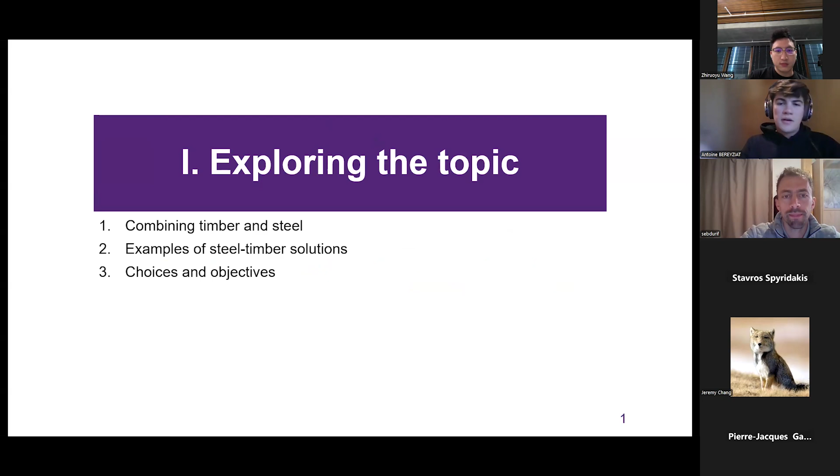I'll start by giving you a bit of context. Before going into more detail, let me explain why we chose to combine wood with steel. When we look at the properties of these materials, it becomes clear that they can be combined to make them complementary. First, steel is highly ductile, whereas wood has a near brittle failure.

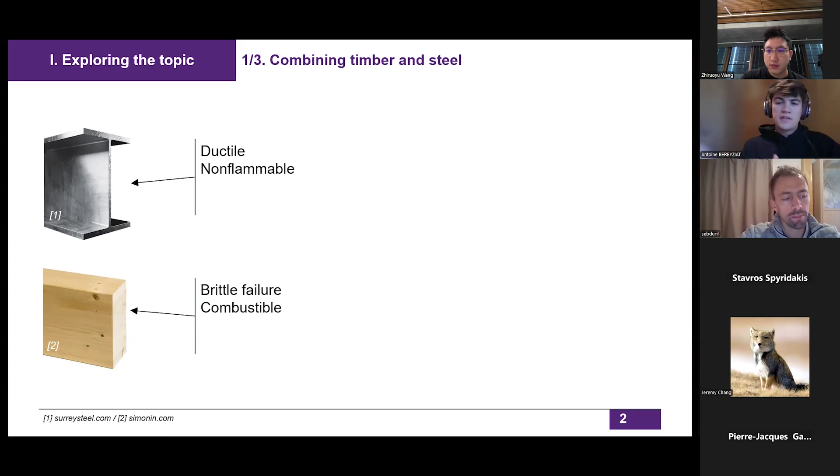Moreover, steel is non-flammable, whereas wood is combustible. But the fire resistance of steel is very low because its rigidity and strength decrease sharply when its temperature rises. On the contrary, thick wooden elements have good fire resistance. Finally, steel elements are vulnerable to instabilities, warping and buckling, while wooden members have strong cross sections.

Steel and timber also share common features that make them compatible. They do not require water in the building process, and they are suitable for off-site construction.

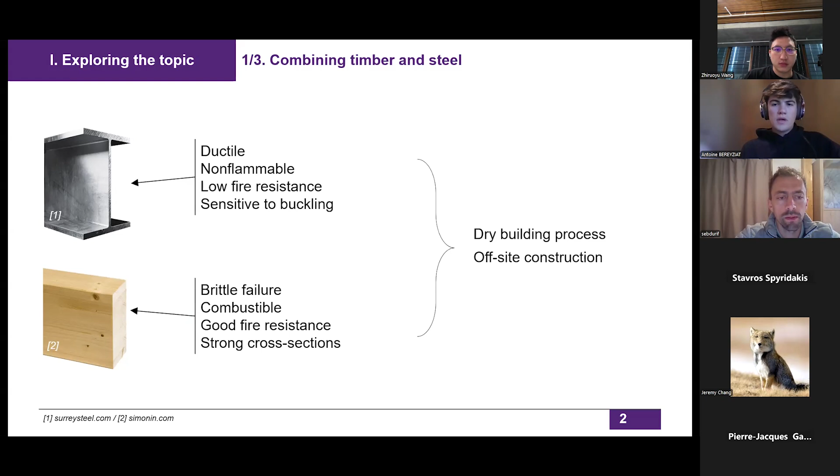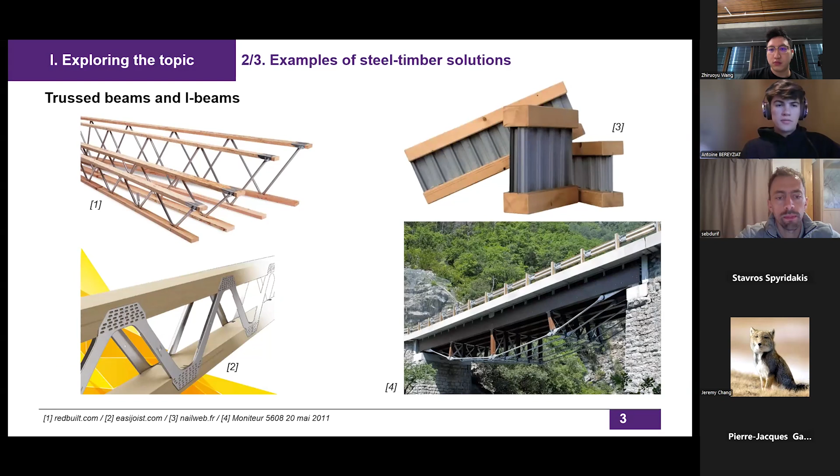Here I have some examples of mixing timber and steel in structural members: truss beams, I-beams, prestressed timber, reinforced timber. I'll pass quickly over these examples — flitch beams, and a large variety of profiles with wooden members. These are already being built, existing with this kind of process.

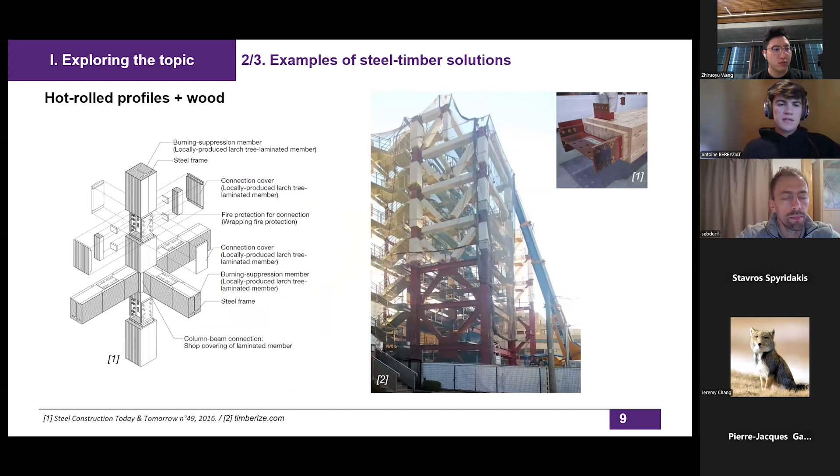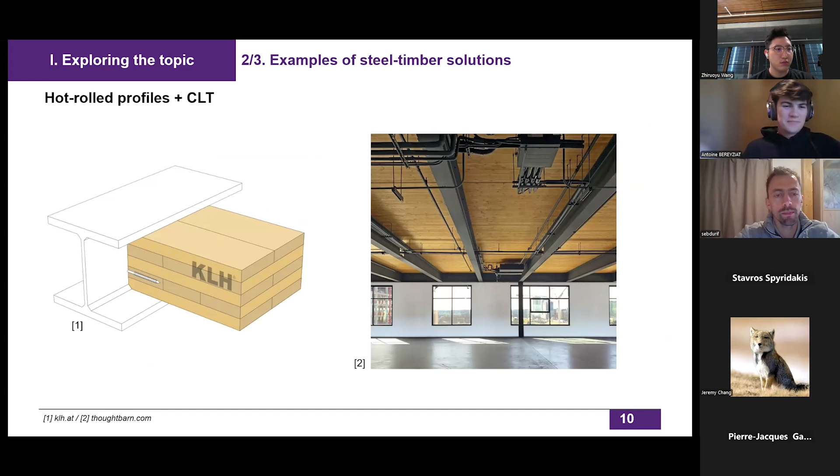Sorry. CLT — Sébastien will tell you more about that later. Faced with all these possibilities, we have chosen to focus on solutions with hot-rolled sections, mechanically assembled with wooden beams.

Preliminary studies on this subject were performed in 2016, and the aim of my thesis was to take these studies a step further by integrating fire situation and fire resistance. I will now move on to the structural analysis of the studied beams.

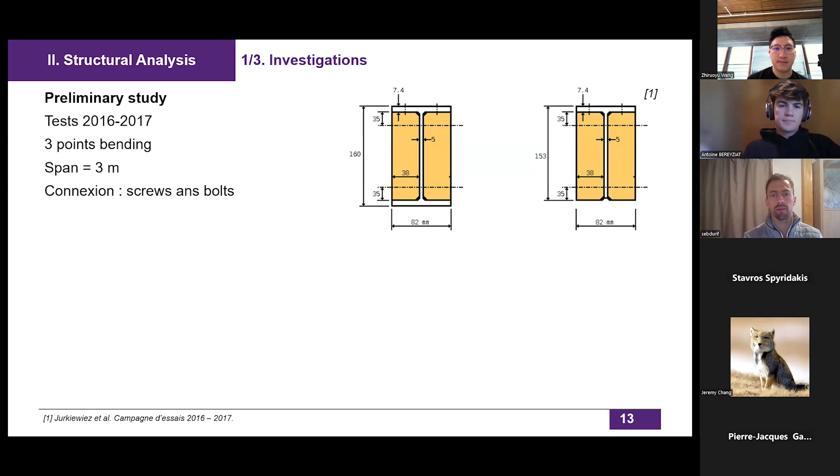Here you have two configurations, an I section and a T section, each connected with two wooden beams using bolts and screws. For the I section, an elastic linear calculation shows that 90% of the stiffness of the composite beam is attributable to steel, while wood has very little effect on the beam stiffness.

For the T section, the stiffness of the composite beam exceeds the sum of the stiffness of its components, steel and timber. It is what I call a composite action. It results in a stiffness gain of 7% in this case.

This is only possible if there is an eccentricity, a gap between the neutral axis of steel and timber elements, and if there is a connection with non-zero stiffness that transmits longitudinal shear between steel and wood.

In the case of the I section beam, the neutral axes coincide, so there is no composite action. Whereas for the T section beam, it would be interesting to further increase the stiffness gain by increasing the eccentricity of the neutral axis, or by increasing the stiffness of the steel-wood connections.

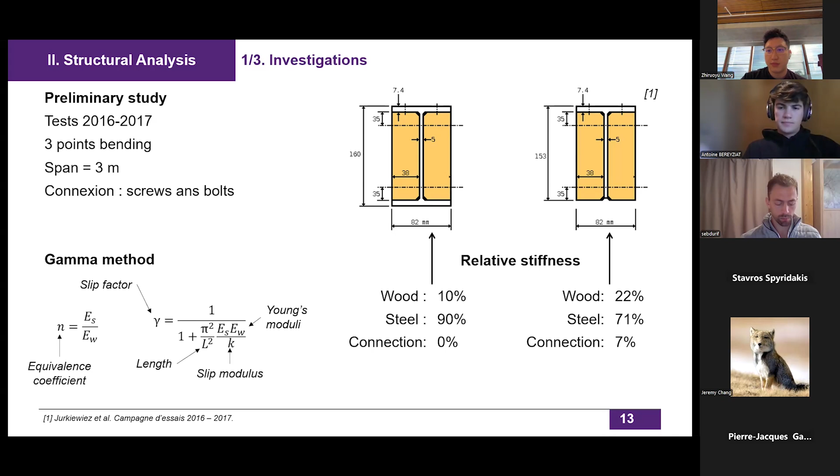But unfortunately, when we try to do this, we generate cracks in the wood, as you can see in this example. And the failure of the composite beam occurs prematurely, and we lose the interest of the composite action. So the stiffness gains that can be achieved are necessarily limited.

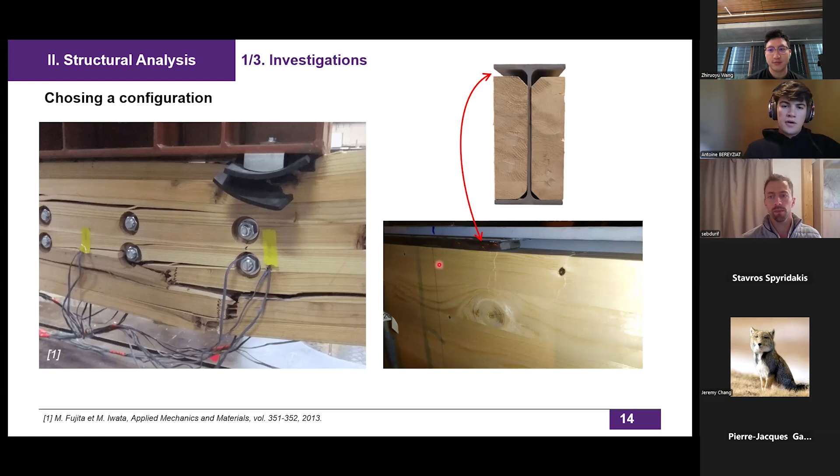That's why I chose to focus on a configuration with no composite behavior, an I-section associated with two wooden beams, with no transmission of longitudinal shear between steel and wood. In this case, vertical loads are transmitted from steel to wood by simple contact, and we use metal shims to ensure good contact between the top flange and the wooden element.

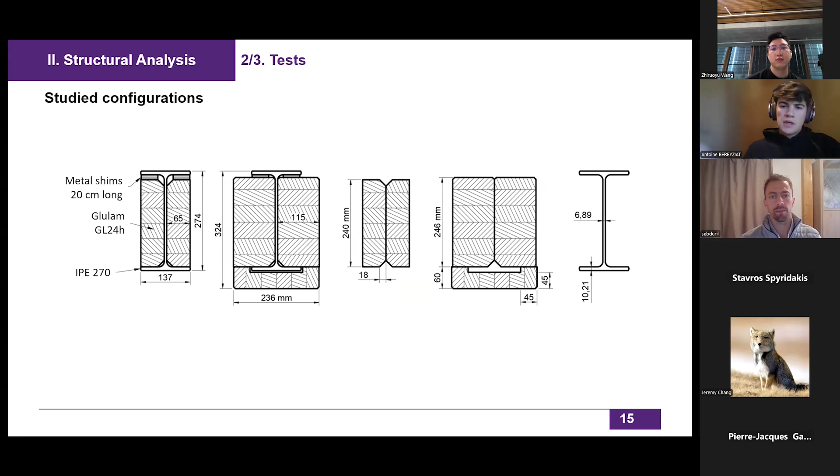Here are the configurations we studied, so two composite sections and their components. We tested this beam with a span of 4.3 meters in 4-point bending. The loading system looked like this, with lateral support against buckling.

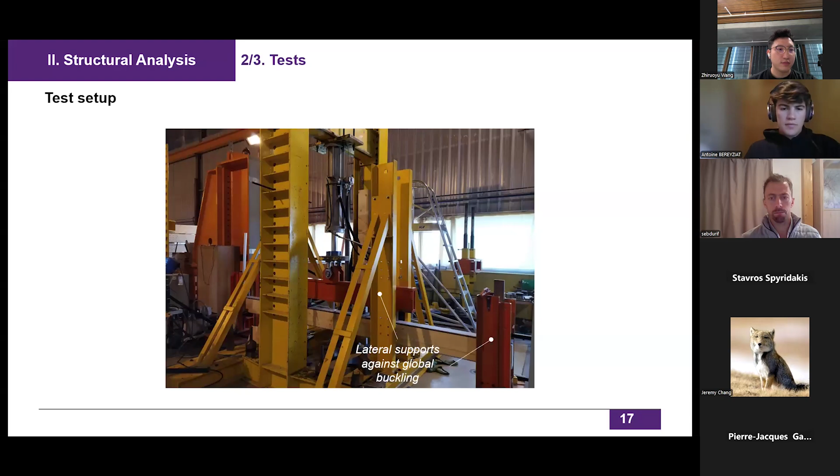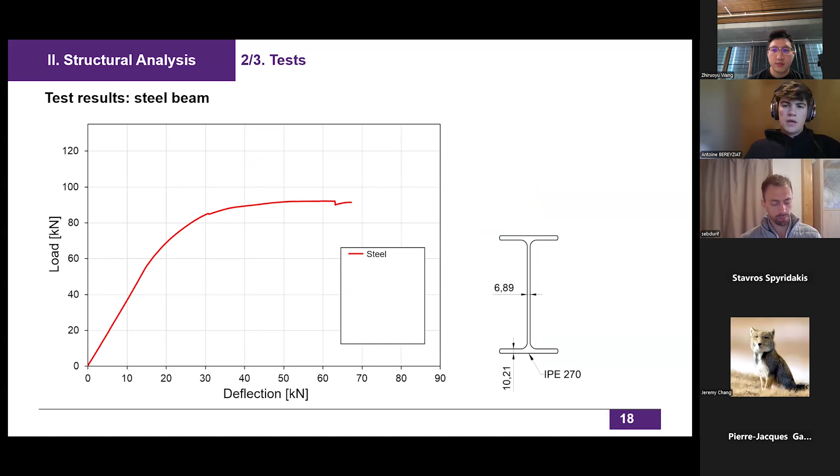So here you have the load deflection curve obtained for the steel section taken alone. Then there are the wooden beams.

In the case of the composite beam, we obtain this behavior. So we have an interesting resistance compared to steel. And in this case,

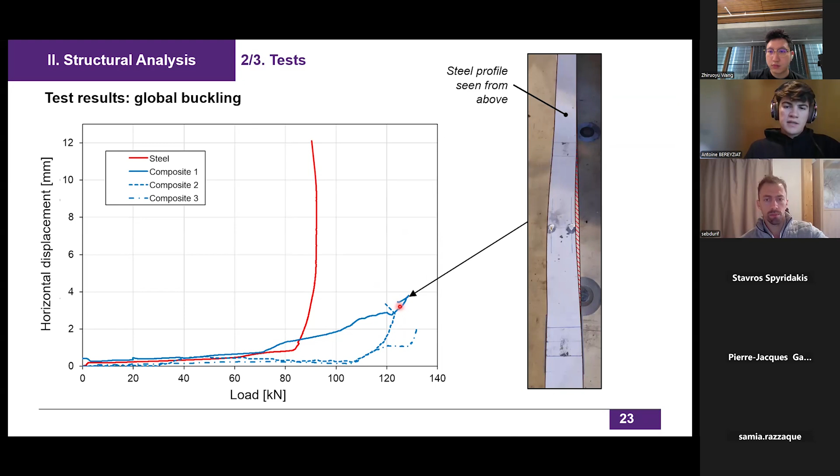After a while, the deformation becomes so great that buckling occurs. But in the case of the composite beam, the buckling occurs much later with less intensity compared with steel-only member.

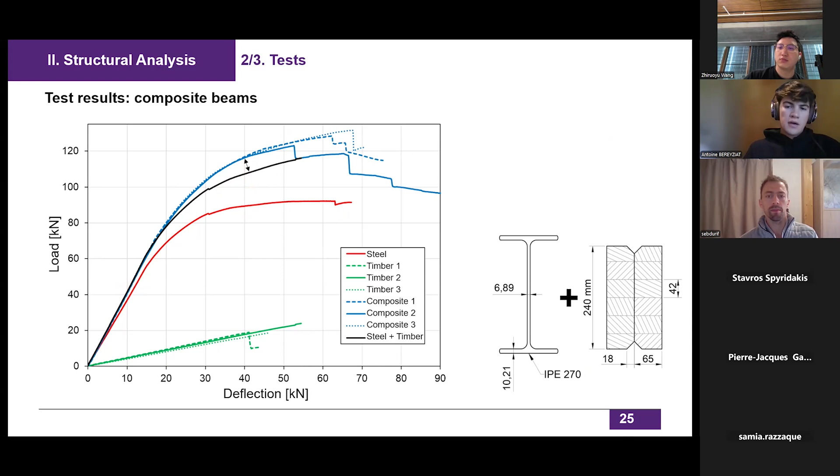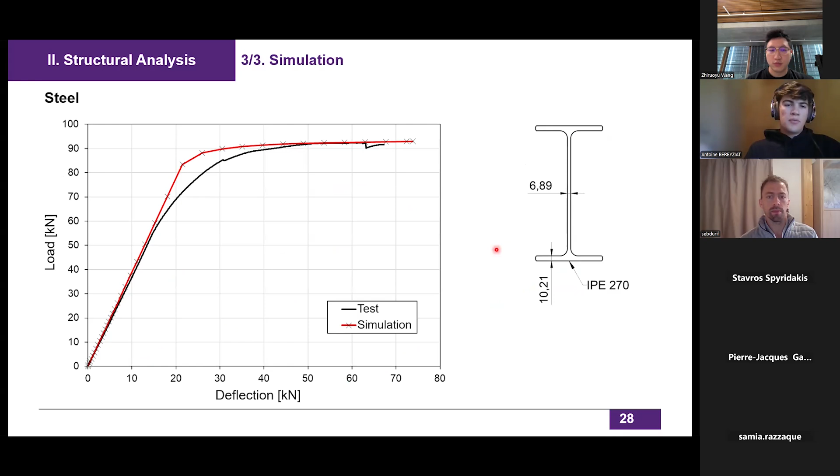This phenomenon is also observed for the second configuration. We made an FE model to try to better understand this phenomenon. Here we can see that it worked pretty well for steel. Same for wood-only beams.

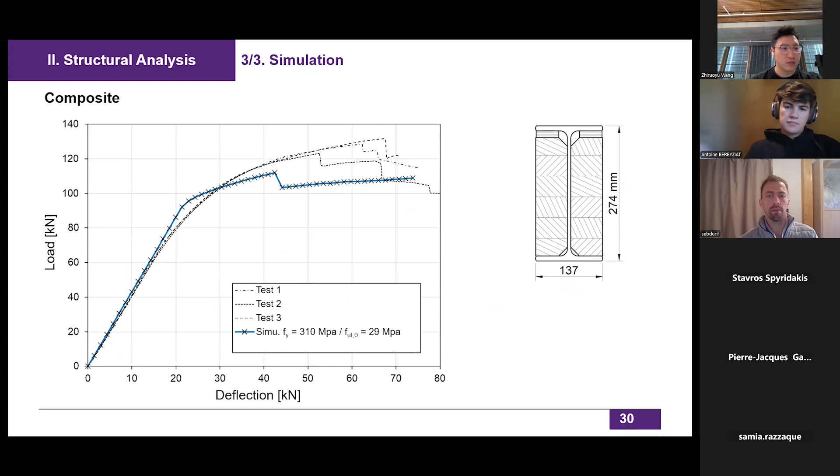But when we use the same parameters for the composite beam, we can see that the composite effect cannot be simulated. In this case, the load is not high enough, and wood failure occurs too early.

I managed to obtain a satisfactory match by increasing the yield strength of steel and the tensile strength of wood. I have the same kind of results for the second configuration. So this manipulation of the model parameters highlights the importance of the composite effect, but does not provide a physical explanation of this phenomenon. So further work is needed to fully understand and explain it.

Next, let's look at the behavior in a fire situation and how timber can be used to protect steel against fire.

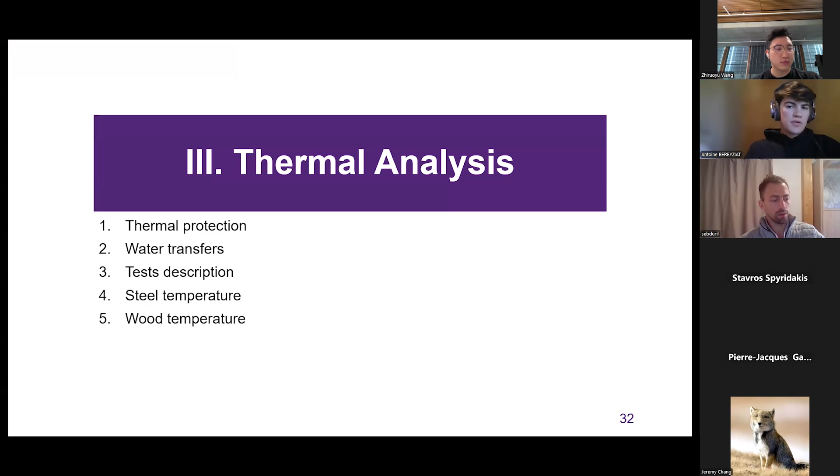This idea may seem counterintuitive at first, given that wood is combustible. However, it is also an insulating material which burns relatively slowly.

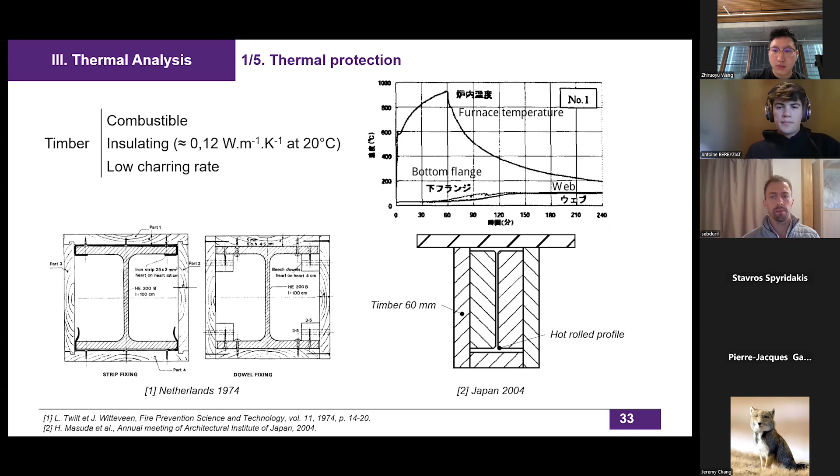This idea is not new, as tests have already been performed in the Netherlands or in Japan, for example. And this principle is already used in some buildings in Japan. Japan only, as far as I know.

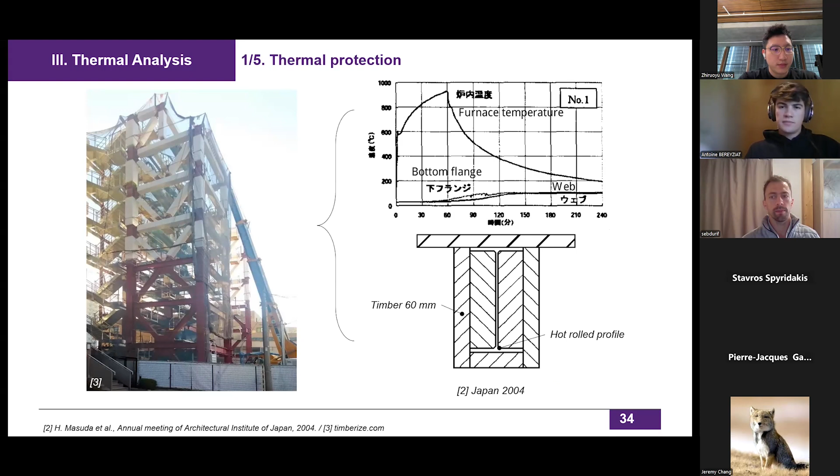Timber also contains water, which helps protect steel against fire. It allows keeping the temperature of steel at around 100 Celsius degrees for several minutes.

This phenomenon is explained by the mass transfer that takes place in wood because of the temperature and pressure gradients that occur in a fire situation.

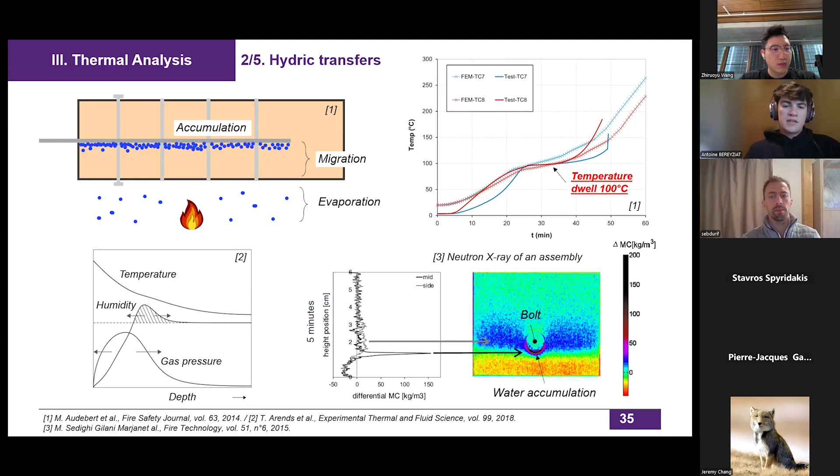So some of the water contained in wood evaporates outside, and another part migrates inside the wood. This migrating water will eventually reach the metal plate and accumulate, which explains the temperature dwell on the steel temperature measurement. This accumulation phenomenon has already been observed by X-rays on bolted assembly, as you can see here.

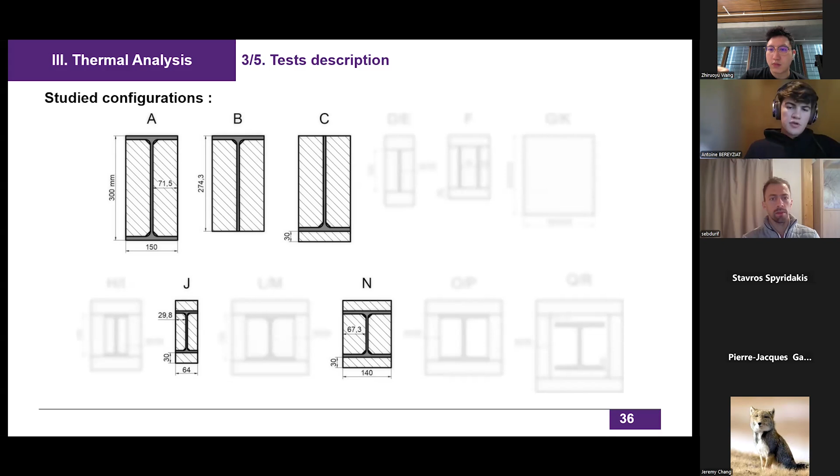So we tested these configurations during two unloaded fire tests. Here we have fully protected configurations, more simple geometries, and finally a configuration in which steel is partially exposed to fire. The test specimens were 80 centimeters long and were exposed to fire on 3 or 4 sides.

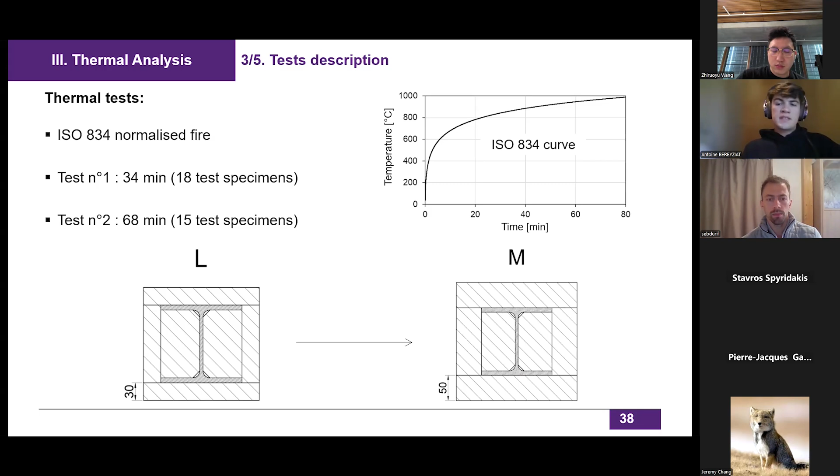In the first test, 18 specimens were exposed to a standardized fire, ISO 834, for 34 minutes. The fully protected profiles were covered with a 30 millimeter thick timber board. In the second test, 15 specimens were exposed to fire twice as long, and the timber thickness was extended to 50 millimeters.

First, the measurement showed that the thermal protection provided by wood is effective. For example, for this configuration, steel keeps below 200 degrees for over 30 minutes when using 30 millimeter thick boards. This time rises to over an hour for 50 millimeter thick boards, and during this time the steel remains intact.

Secondly, we can see that the temperature dwells at 100 degrees Celsius for several minutes, reflecting the beneficial and non-negligible action of the water contained in wood.

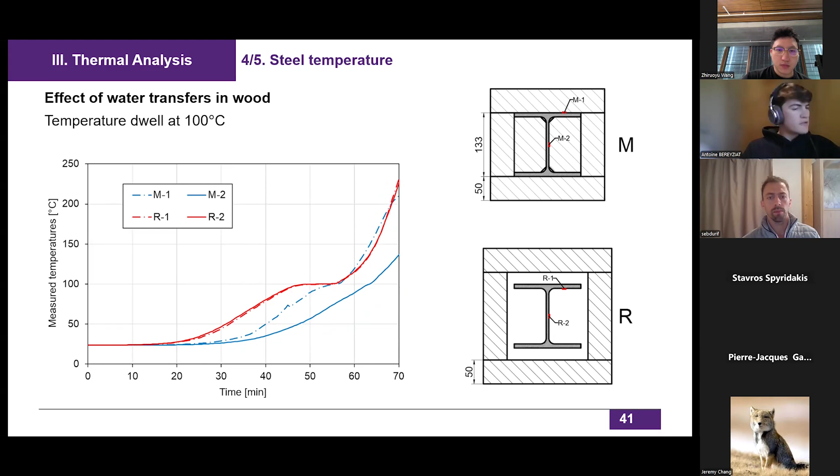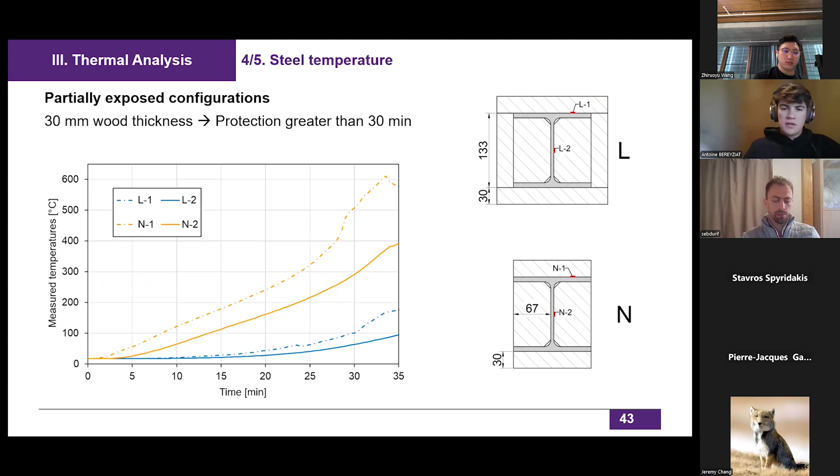Fourthly, on this graph you see that configurations partially exposed to fire, with steel partially exposed to fire, are obviously less effective, but they offer a certain protection. As you can see, the steel remains below 500 degrees Celsius after around 30 minutes, so it's non-negligible protection. If the profile were completely unprotected, it would reach this temperature in just 10 minutes.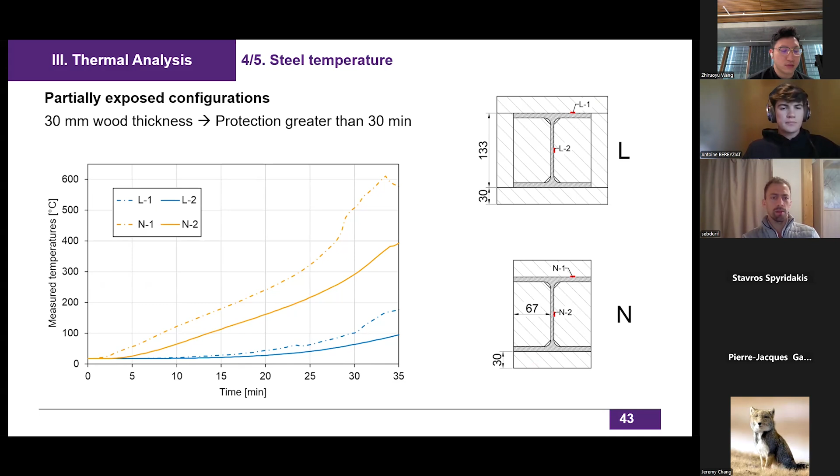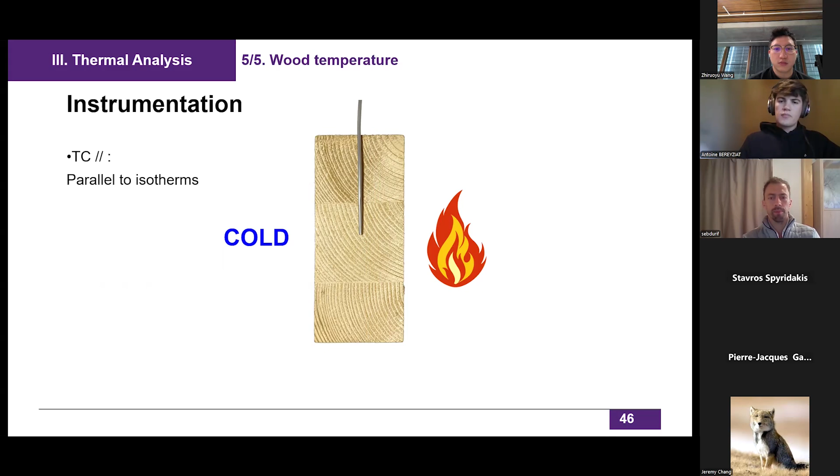Regarding the wood temperature, I would like to speak about instrumentation. We investigated different measurement methods regarding the orientation of the thermocouples. The thermocouple can be placed parallel to the isotherm like this, perpendicular to the isotherm on the cold side, or on the hot side like this.

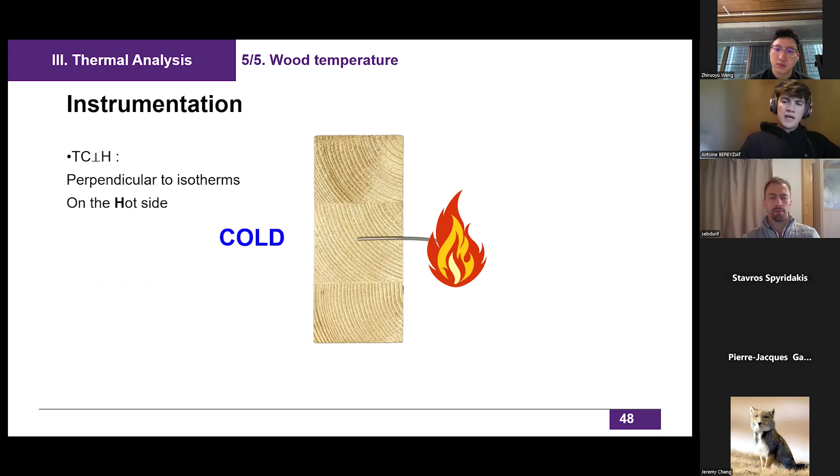So from there, I had reliable test results and a validated model. We can see here, for example, that the test-simulation match is satisfactory, which enabled me to go further with thermomechanical analysis.

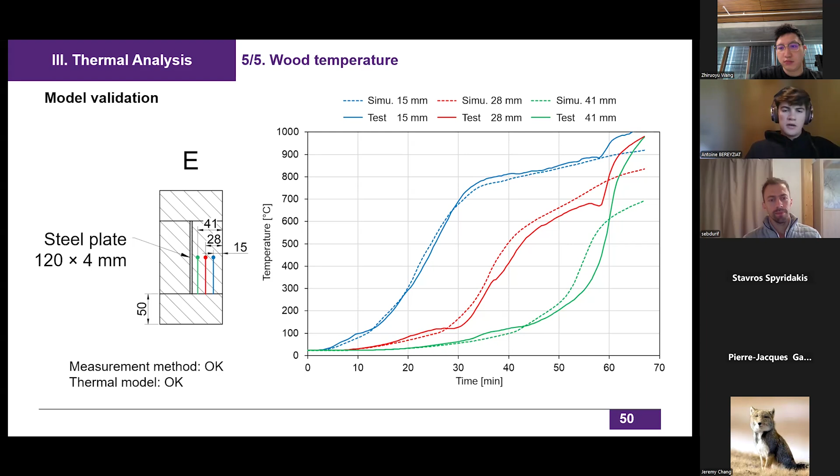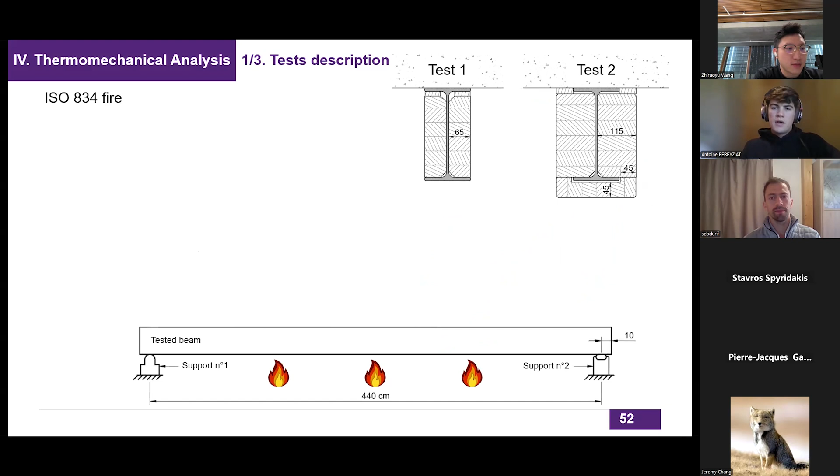So we did two loaded fire tests. The configurations are the same as those tested at room temperature, and the test setup was like this. So you have the tested beam, the supports, then the cellular concrete slab used to close the furnace, the loading beams, and finally the hydraulic jack that applies a constant load during the fire exposure.

Three things are measured: temperature, time, and midspan deflection. We chose to apply a loading corresponding to 40% of the ultimate load. But finally, because of the weight of the test setup, the moment applied to the tested beam corresponded to 43% of the ultimate load.

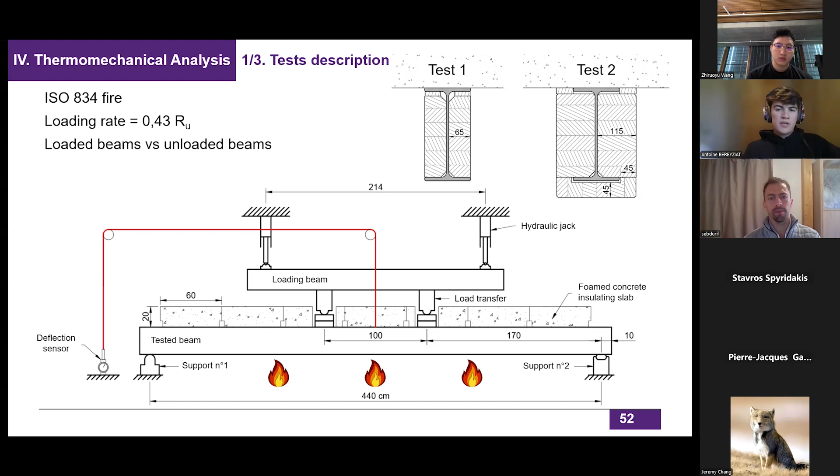At the same time as this full-size beam, we tested the same configuration, but on an unloaded one meter long beam, in the same test, to see if the mechanical loading has an influence on the temperature. And the answer is yes. This is clearly seen in configuration 2 by looking at the temperature of the steel at the bottom flange. There is a big difference between the unloaded beam and the loaded beam.

In this case, a sudden rise in temperature can be seen, corresponding to hot gases coming into contact with the steel, indicating that the wooden protection at the bottom is no longer sealed, or maybe even completely degraded. So the progressive degradation of the lower part must be simulated to obtain satisfactory simulation results.

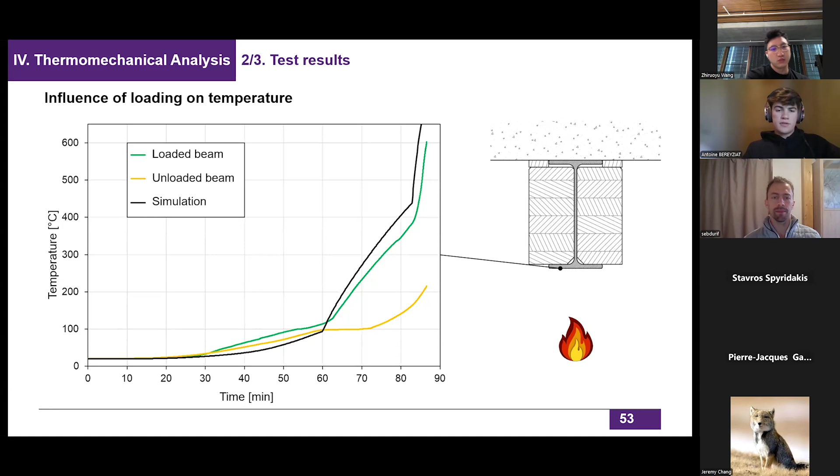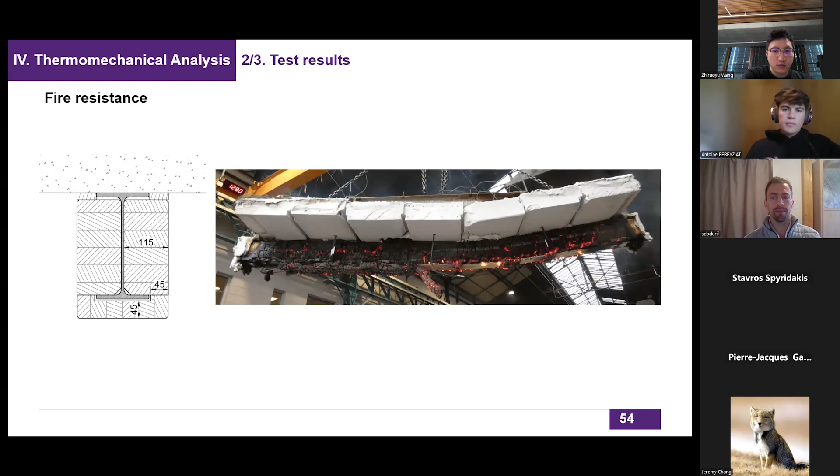By way of comparison, I calculated the fire resistance of an unprotected metal profile with the same loading rate, and the result is a fire resistance of 13 minutes. This shows that the composite beam can achieve an interesting fire resistance time, even though the load supported is greater.

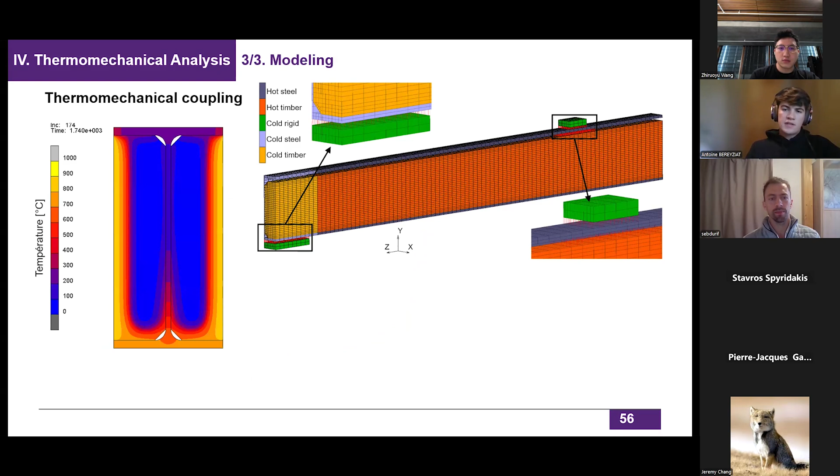To refine the analysis, I tried to model this thermomechanical behavior. It works thanks to a thermomechanical coupling and temperature-dependent material properties. For steel, I introduced a coefficient of expansion and also implemented temperature-dependent reduction in moduli and yield strength. The expansion of wood is negligible, but I have introduced a reduction in its modulus of elasticity, shear modulus, and strength.

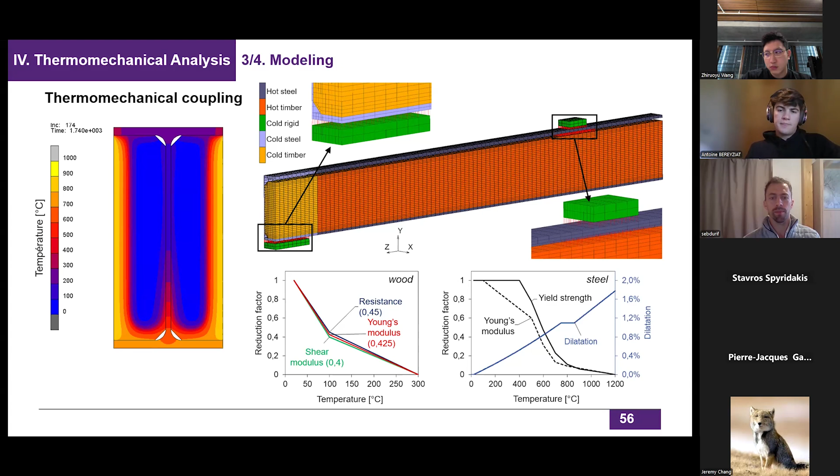So, in conclusion, I would say that we found an interesting composite behavior of the tested beams in the elastoplastic domain. Timber seems to be confined by steel, while steel is reinforced against buckling by wood. The ruin occurs because of torsion failure in timber, but the composite beam keeps a significant bearing capacity. In fire situation, wood offers an effective protection to steel. We showed that 45 millimeter thick timber protection results in a fire resistance during 81 minutes. Timber acts as a thermal protection and as a structural backing during fire.

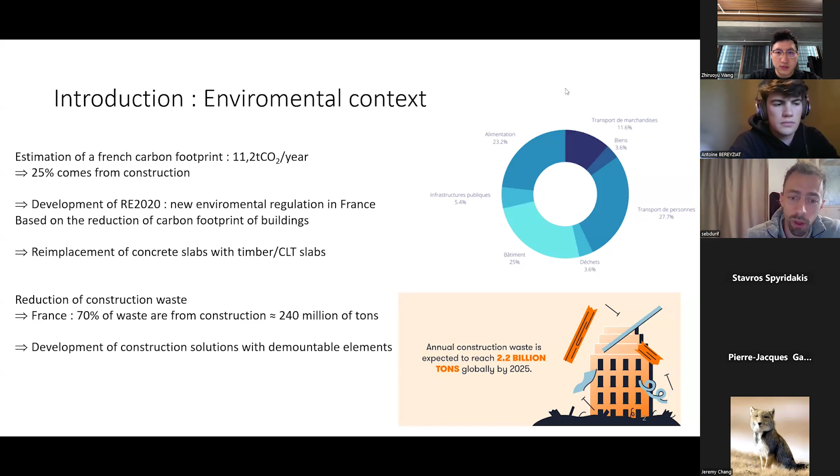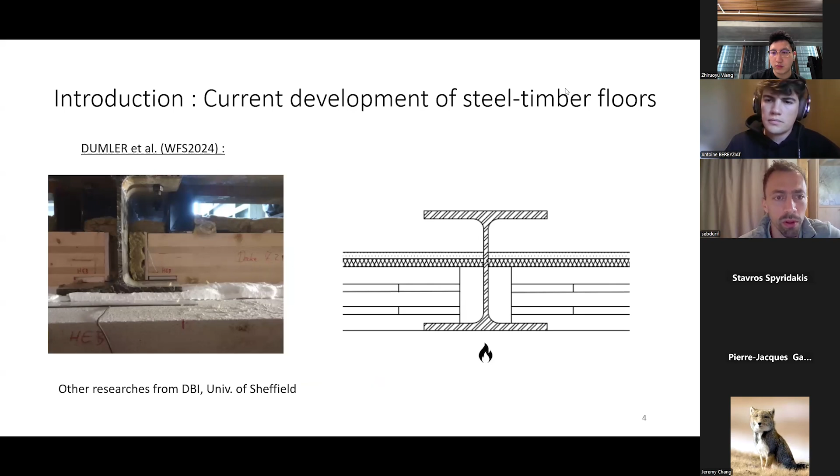So just briefly some examples that inspired us to propose this project. Some works use CLT slabs combined with a steel profile with mechanical connection, mainly bolts. Here are some examples. And other researches were, in this case, based on the study of the fire behavior of the combination of CLT panels and steel sections that were presented here, for example, at WFS 2024.

Other developments were made by different companies. We can see here from Peikko, a Finland company, who developed a composite structure made of a steel channel section fulfilled by concrete and linked with CLT panels to ensure kind of fire protection. No mechanical action here, just studies to validate the fire protection of the CLT panel on the steel section.

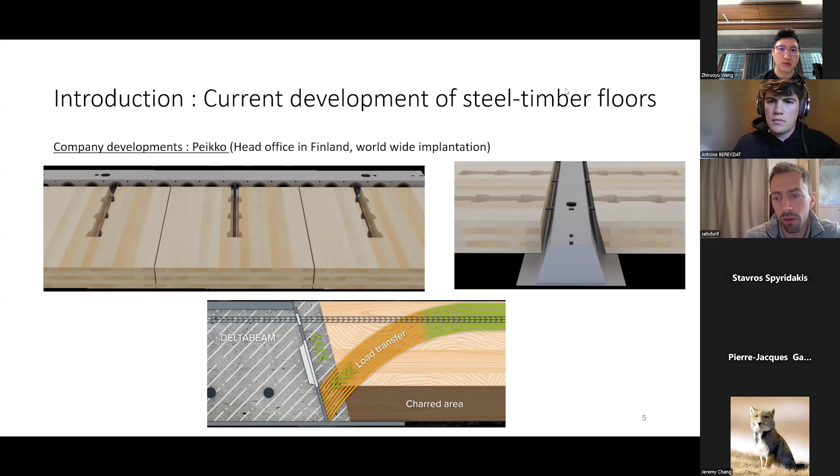And now also rather new works are proposed by WSP in collaboration with the University of Warwick, where we can see that they are working clearly on a combination of steel section and CLT panels to propose a kind of composite structure that works well.

So the main subject that we wanted to work on during this project is the development and mechanical study of a demountable steel-CLT composite floor and the evaluation of its fire behavior. So the two main issues are to propose a low carbon footprint solution and also a demountable solution.

In this project, we have three partners. The first one is Institut Pascal, which is my laboratory based at Clermont-Ferrand in France. The two others are also French laboratories based at Lyon and Saint-Étienne. Just to remind, the PhD thesis of Antoine was made in collaboration between Clermont-Ferrand and Saint-Étienne, the LTDS, with my colleague Maxime Audebert and the CSTB.

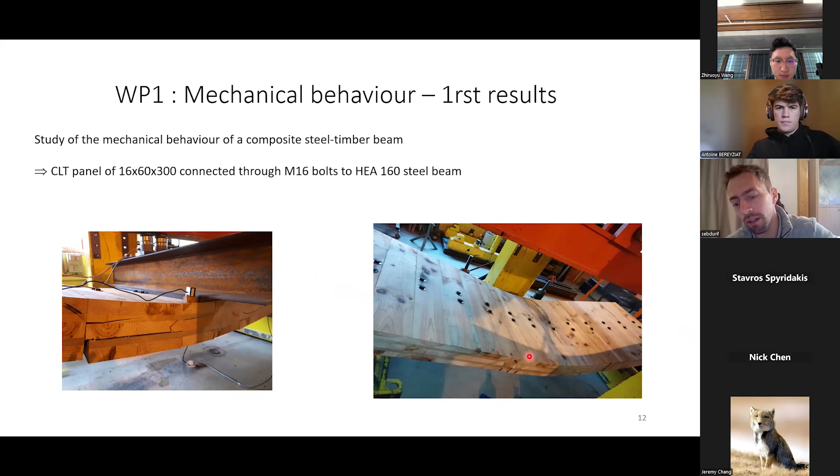A second configuration studied was monolithic CLT panels, where the CLT panel is in the same direction as the steel section. So here is the first case.

But we clearly observe a high increase in strength due to the composite action.

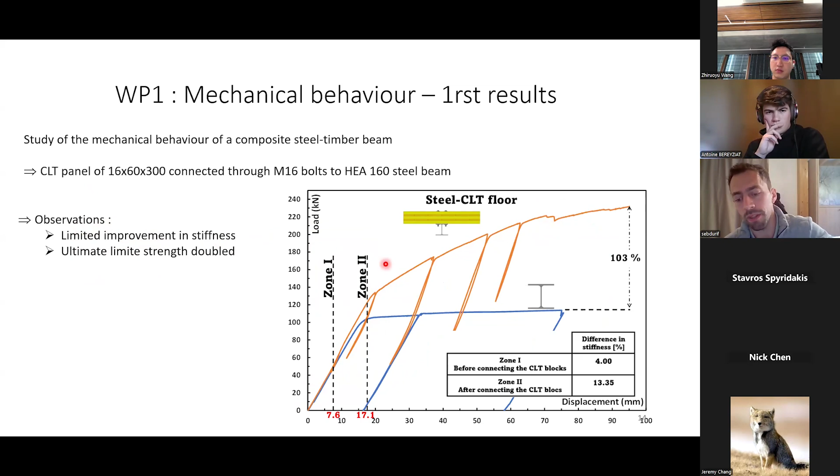Ultimately, we can clearly see that the composite action leads to very high strength, but only a limited improvement in stiffness due to this type of connection.

Here is a comparison with the numerical model being developed, where we can calibrate the model on this experiment, but it's still ongoing. For example, here we don't have any degradation in timber inside this model, so we have to continue developing this tool.

The second configuration studied mechanically is the slim floor configuration, and we prepared two main configurations.

The first configuration uses HEA sections, and the other uses U sections, as normally you have a timber floor slab here and also here. So the best configuration should be the U section, and we wanted to compare both of them.

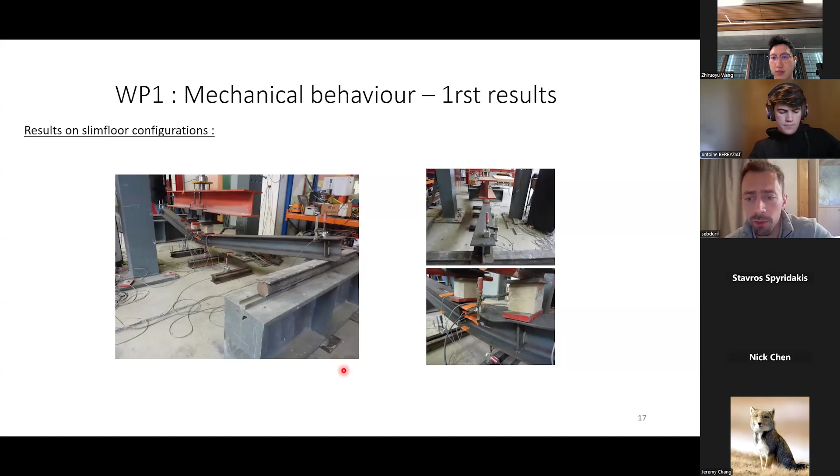The tests were made just this August, so we have rather new results. Here are the experimental tests of the steel sections, and here the combination of steel section and CLT panels. The load here was applied directly on the steel section.

The idea will be to compare also when we apply the load directly on the timber slab. So we reached failure. We chose the CLT panels to get a kind of equilibrium between the steel stiffness and the timber stiffness, so we could see that it was rather equivalent. As for the steel and timber beam, we have a great combination of both to get the behavior of the slim floor.

The second configuration with the UPE works rather similarly, and we can see that we reach clearly a great behavior even after the plastification of the steel section, where we follow clearly the stiffness of the CLT panel until failure.

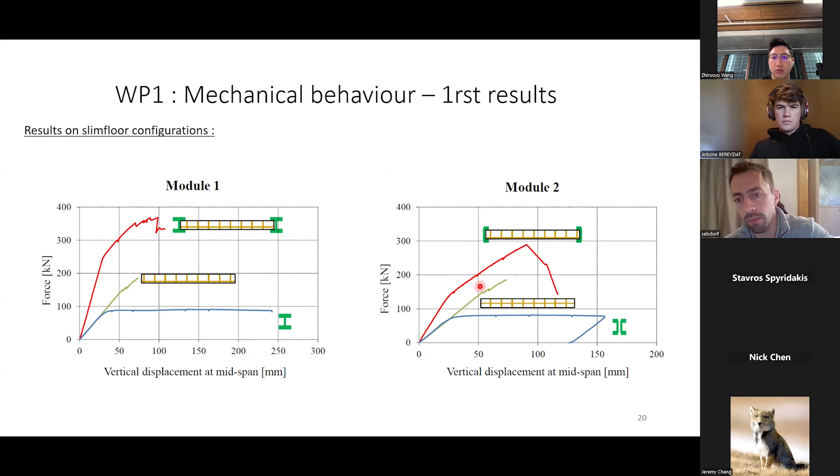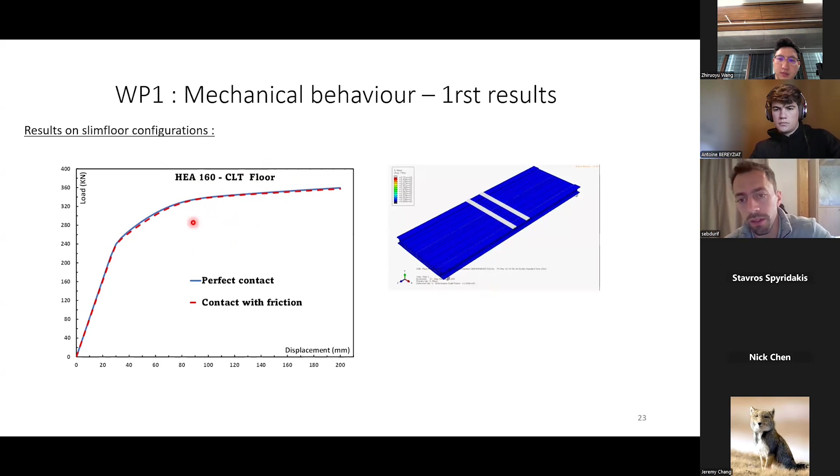So the numerical model has been proposed and compared to the experimental test, and can be used to evaluate the influence of the contact and connection between the CLT panel and the steel section, to ensure this contact does not act a lot in this behavior. We could see that if we make a glued contact between the timber and the steel, versus just friction contact, we reach exactly the same behavior, which was really expected.

So then I will pass to the second task. These are the first studies that we made during the postdoc, during the 4 months that the student could work with us. We made some tests in a furnace.

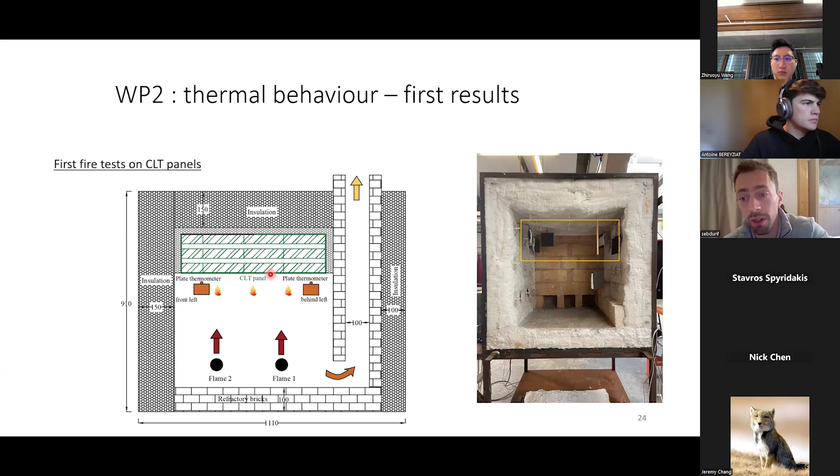We have a very small furnace in another part of our lab, about 1 meter by 1 meter wide and high, with 2 burners. This was mainly to evaluate the thermal gradient in the timber slab. We were expecting to also test the steel section, but we could not afford to get those tests during this postdoc, so unfortunately I will show you just the results we obtained for the CLT panels.

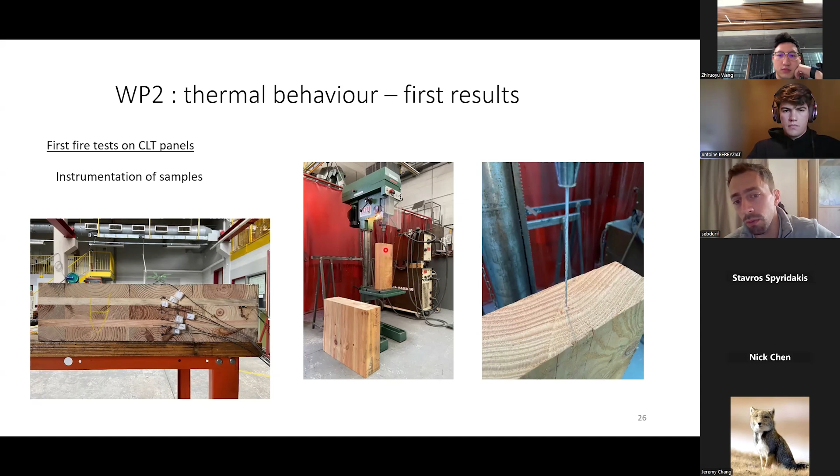It was the same panels that we tested at cold condition, with 5 layers. As these panels were not fabricated with thermocouples, we had to input the thermocouples afterward, which is rather complicated, especially to get horizontal thermocouples that are parallel to the other layers. So this is what we tried to use to get as much precision as possible to have parallel thermocouples.

So we compared the expected parallel thermocouples with vertical thermocouples, which are much simpler to install on CLT panels, especially if we look at full-scale tests, where it would be rather difficult to install horizontal thermocouples. We wanted to get an idea of the difference we could observe between both of them.

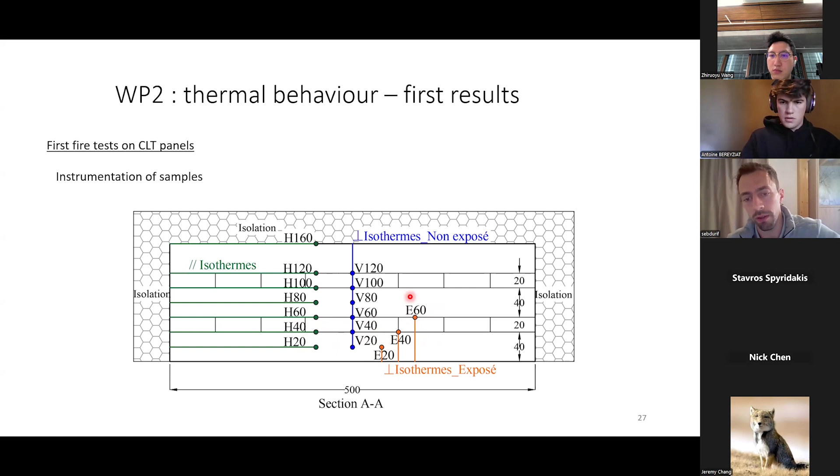That was clearly observed in our test, which is interesting for us because it was important to get this delamination and observe it combined with the steel section and its impact on the thermal gradient.

We could clearly observe the delamination, and the fact that globally, horizontal and vertical thermocouples gave similar results, but we remain with a lot of doubts on the precision of those horizontal thermocouples, as the process used to install them was not judged precise enough.

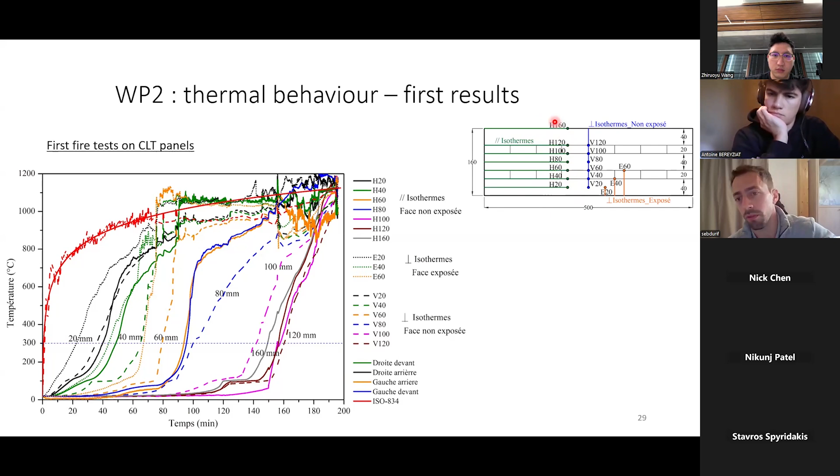So further tests will be done during the PhD thesis that will start in November, where we will try to install the thermocouples before the construction process of the CLT panel.

So here's a summary of what I said: it's difficult to compare parallel to isotherm measurements and unexposed measurements, and we could clearly observe the delamination of CLT slabs even for such small samples.

So the next step, as I said, will be to study the thermal gradients inside a steel section that will be installed in a kind of slim floor configuration. The objective is to evaluate various protections we could apply on the bottom flange of the exposed steel section. The second objective of the PhD thesis will be to prepare the full-scale beam test that will be led at the laboratory at ENISE, which has a bigger furnace allowing thermomechanical tests on beams of about 2.5 meters long.

Okay, so thanks for your attention. Here are the different partners, the colleagues working with me on the project: at Clermont, and UCBL, the University of Lyon, with Bruno Jurquiviez. And finally Maxime Audebert, colleague at ENISE in Saint-Étienne, who also worked with me on the PhD thesis of Antoine.

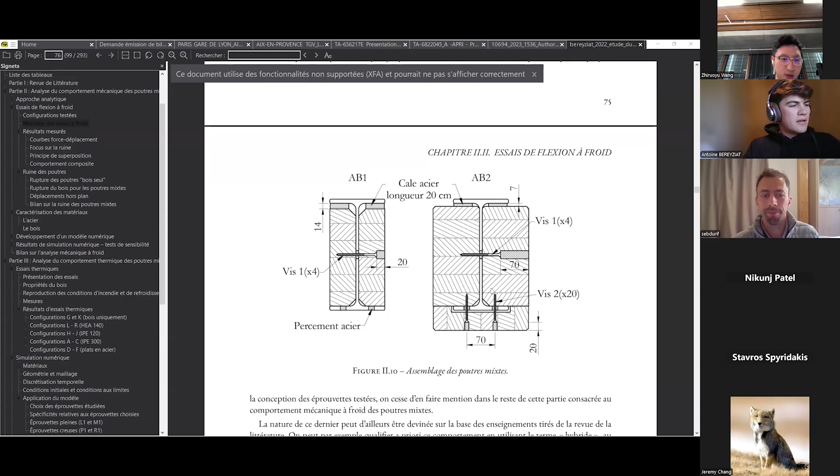Maybe I can share a picture - yes, I have a good one here. Do you see my screen? Yes, ready. Okay, so here you can see, sorry it's in French, but you can see the screw with oversized holes in the flange and in the web of the beam. They are very thin screws which don't have any structural resistance.

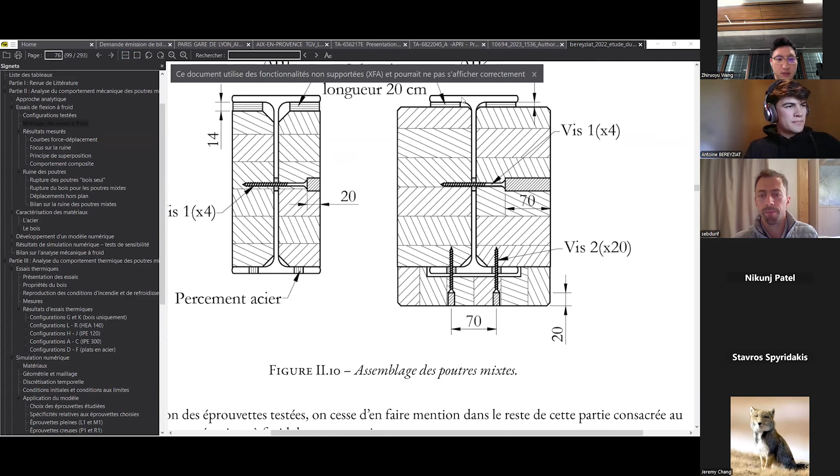Thanks, Dr. Antoine. And we got a question for Dr. Sébastien from Yohito - he's an exchange PhD student in our group, from Chiba University in Japan. His question is: how are those H-shaped beams connected onto the CLT slab? He assumes the strength and stiffness of the composite slab highly depends on the connection configuration.

Yeah, exactly, you're perfectly right. Just to be precise, if we're talking about this case, here we just have steel bolts, M16 bolts, regularly spaced along the beam. Even in this second case where we have a monolithic CLT panel, we have M16 bolts, that's all. We have some initial gaps between the bolts and the upper flange of the steel, initial mounting gaps close to 1 millimeter.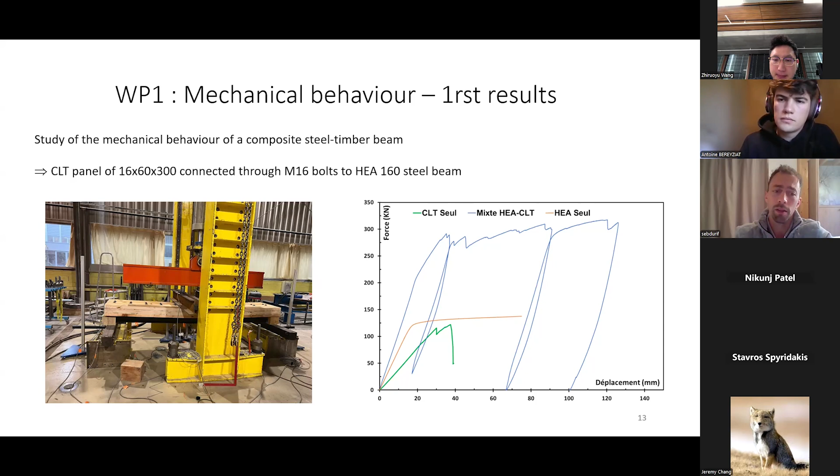But in the CLT panels, normally we have very small gaps, but negligible. The main problem of this connection is the degradation of timber around the bolt, as timber will deform a lot around the bolt. We are studying here if we're able to model this behavior, and if so, propose some alternatives - some companies have already found some solutions.

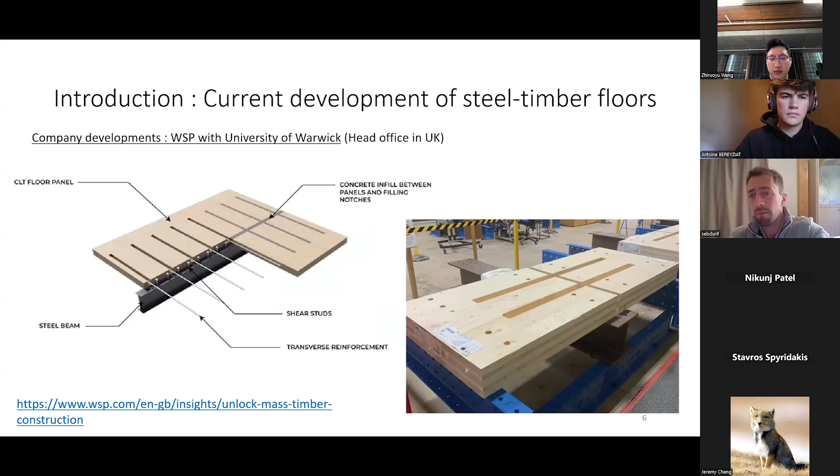Clearly, one of the best ways is to consider a complementary material that will make this connection. The problem for us is that it's not demountable. So we are looking at solutions that offer higher stiffness but remain demountable. But we will clearly look at things that are close to this.

This is the case of a configuration where we have the standard configuration, with the slab above the steel section. In the slim floor configuration, we didn't have any connection. The idea was exactly the same as for the thesis of Antoine. Here, as the center of gravity of both are very close, the connection shouldn't play a role. So we just input a steel plate at the loading points, because in this first case we are loading on the steel section. So to be sure that we have load transfer between the steel section and the CLT panel, we input these steel plates.

But later on, we will be doing tests where we load directly on the timber slab, which is more realistic in the real case. And in this case, we will not need any plate at all. We will try to see if we have any problem here and if we have good load transfer. We just had some dowels here, but with wider holes in the U section to avoid any shear transfer by these bolts or dowels, just to be sure that the U section does not fail by torsion. That was the possibility for this section. So here we had just a dowel to prevent lateral torsional buckling of the U section. But even here, no connection at all.

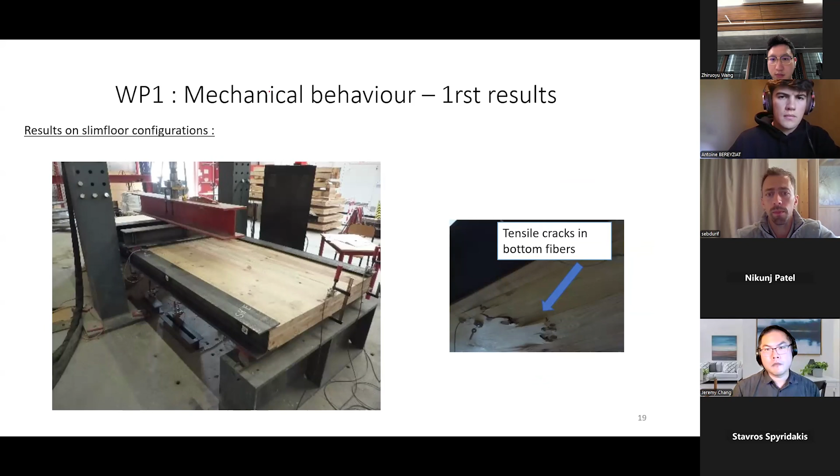Just one question, starting from the presentation earlier. Antoine, you showed some significant cracking in the mechanical test under ambient temperature. I'm wondering whether there's any suggestion to overcome that, especially in fire, because if cracking like that happens, that's not good for fire at all.

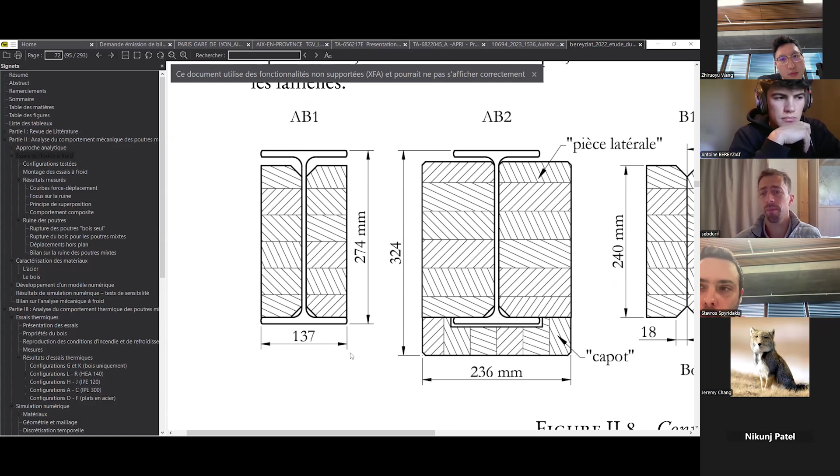Because I remember Antoine mentioning that did occur between the lamella layers in CLT panels, yes. But the glue used generally to make glulam and CLT are different, and we don't have a lot of problems of delamination for glulam beams, but more on CLT.

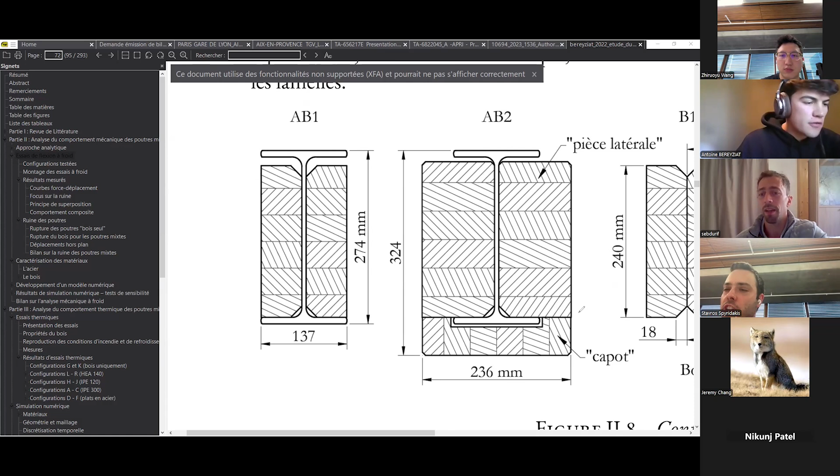Is that because of more shear that you get in the CLT instead of the glulam, or we don't know the reason why? I have seen research in Europe with the same kind of configuration, with CLT in place replacing glulam, but I don't remember if it was in a fire situation.

But it depends on the glue. Now we have more and more non-delaminating glue that is used for CLT. In our case here, we studied the CLT panels that were provided by the company.

But it's for us clearly an issue. Will we pursue the work with this kind of glue, or will we start to look at the future? That clearly is the future—using glue that avoids this kind of delamination. But in France it's not very widely used because it implies changing the whole process of the companies.

So the companies are not really dedicated to using this type of glue because of fire regulations that impose protecting CLT panels under fire, since it is combustible. They don't see, for the moment, the importance of changing everything, as it doesn't provide a very important change in the global aspect of the floor.

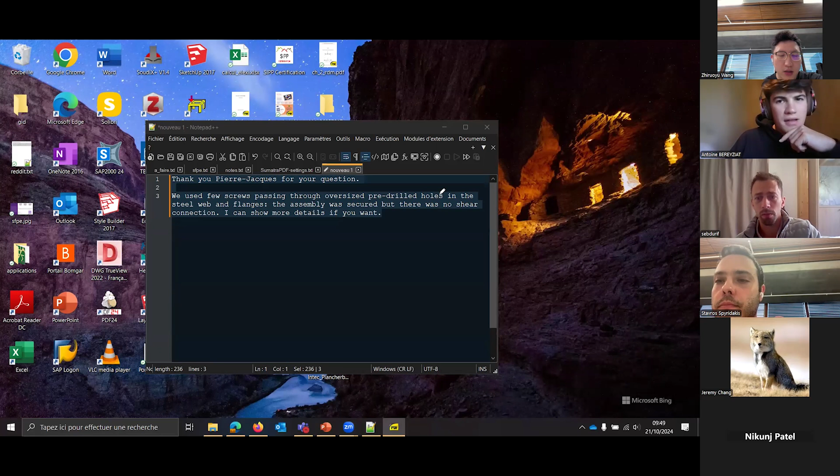Present this quickly. So the idea is that this part... can you see my screen? We don't see the PowerPoint. Yeah, we see your screen. We only see the notepad.

Maybe you can see the weak point are the joints. So maybe if we can form this piece to just have one joint at the bottom, it's a better idea. Or making the joint more sinuous with the assembly.

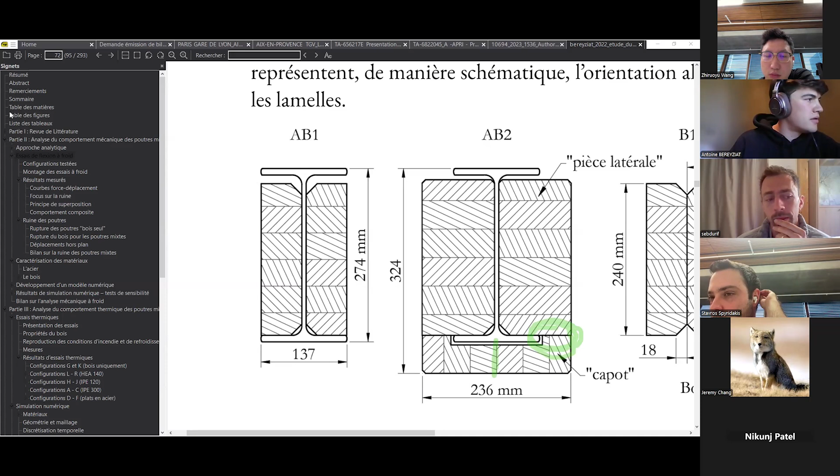It's not a straight joint, but with more complex geometries. In this case, maybe the joint issue is not so important, and maybe we can even glue the joint to keep it closed. That's some prospect.

Looking at it, I was just thinking, because your individual boards, how wide are they? Like 40, 50 mil? The individual boards that you use, are they like 40, 50 mil wide? For the covering, you have 1, 2, 3, 4, 5, 6 - the individual layers. Width of those layers, is it like 40, 50 mil? Looking in the horizontal direction, you said...

236 is the total at the covering. The individual ones, what's the width for one of them? This is the width of the lamella? I don't remember, but maybe 50 millimeter, something like that. Yeah, I was thinking the same, because here in Australia they started doing around 80, 85 mil.

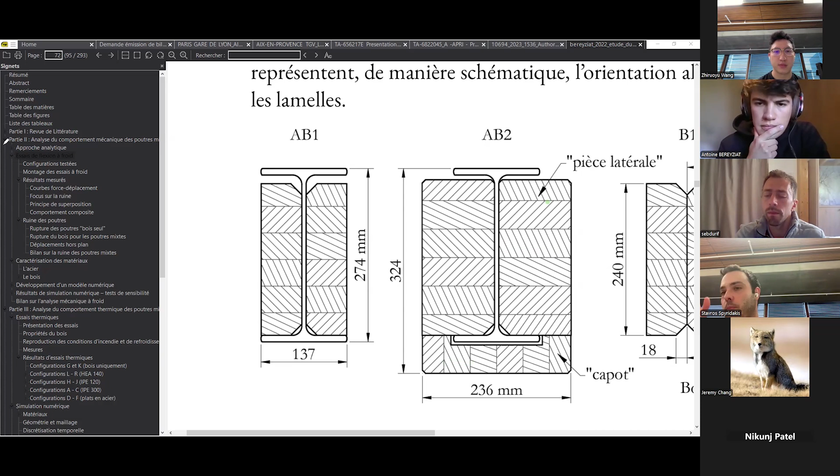So the idea that you're presenting makes a lot of sense, that you can split the drawing and you could have maybe 3 of these if they are wider, so that you don't have the whole thing falling. But yeah, it's an interesting setup.

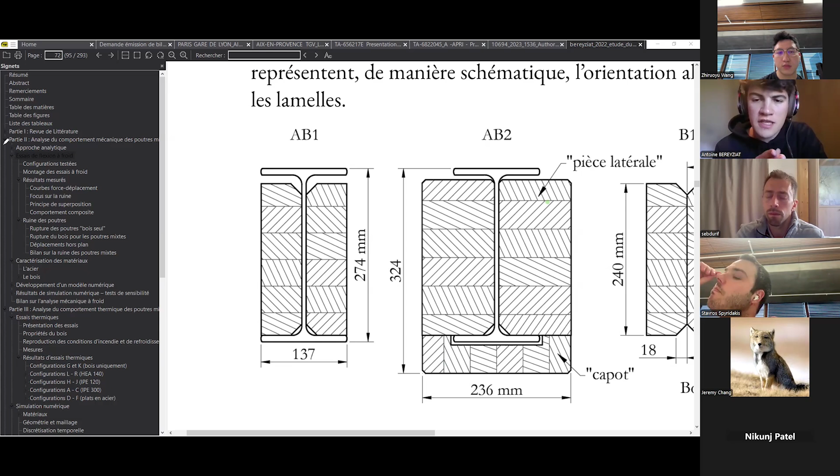Very interesting. But when we talk about fall off, in my case, it occurred maybe 1 hour after the beginning of the test. And in fact, this piece, the bottom piece, was completely charred. So it's normal that it falls - it's not really delamination, just the wood is completely charred.

I see what you mean. So the temperature that you're measuring at the steel flange at 60 minutes, was it 300, 400 degrees, or 200 degrees at the flange by 60 minutes, for example?

It keeps at around 100 degrees for a long time, maybe 150. And then this piece fell off because it's completely charred, and then the steel is directly exposed to fire, and the temperature sharply rises. When this piece is completely charred, maybe the failure occurs 10 minutes after it falls off. So that's why I say that the Eurocode 5 method for calculating the charring depth is a good design approach to evaluate the failure time of this kind of configuration.